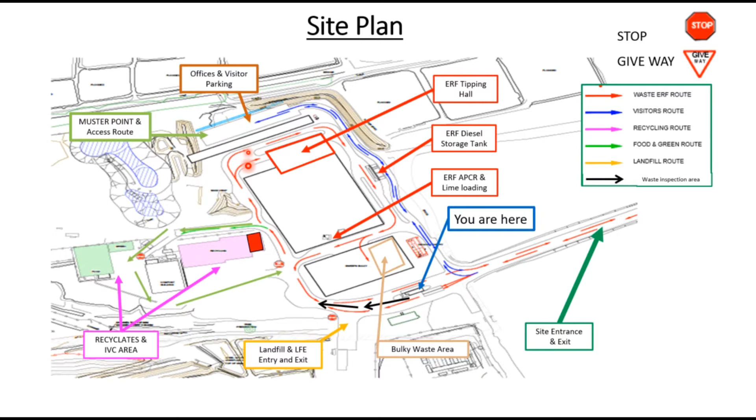There are different routes on site you need to follow depending on what you're delivering. To tip waste to the ERF bunker, you will arrive on site by the main haul road, where traffic lights will guide you to the correct weighbridge, normally to the left of the weighbridge building.

You will then drive over the weighbridge and up the road towards the tipping hall. After tipping, you will exit the tipping hall to the right, past the diesel storage tank, following the road round to the south side of the building before exiting via the weighbridge.

To tip food waste and green waste, once again drive over the weighbridge, heading north towards the tipping hall. You will see signposts for turning on your left. Turn left down this short road and into the food and green waste recycling area.

Take note of the stop line before entering. Once you have finished tipping, continue round towards the recycling building before exiting site via the weighbridge.

For visitors and those coming onto site for reception, at the end of the main haul road, turn right up towards the admin block, where you'll find the main reception. Drivers for landfill should turn left at the end of the haul road.

Take note of all give way and stop signs, especially on the tipping hall road. There are multiple pedestrian crossings on site not indicated by this diagram, including two on the way towards the tipping hall and more by the diesel tank and the APCR loading areas. There are also pedestrian crossings at the weighbridge.

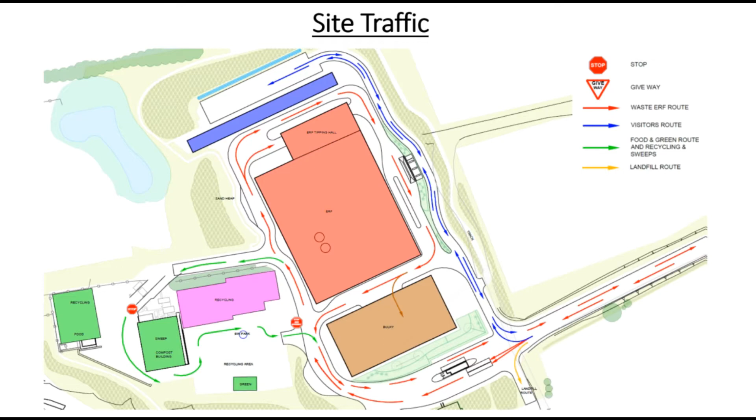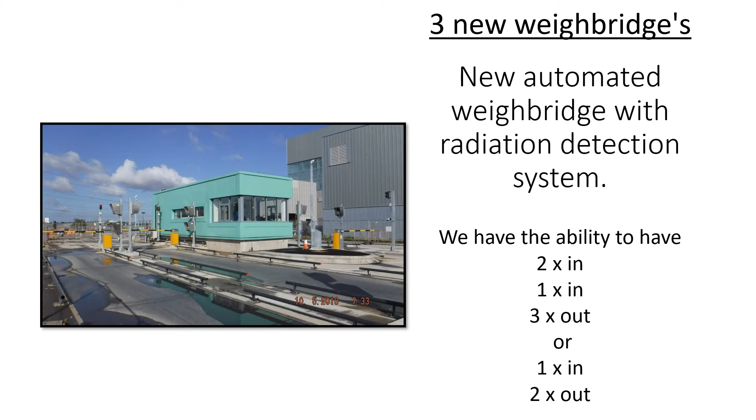There are three weighbridges operating on site. Be aware the flow of traffic over these bridges is subject to change, so pay attention to traffic lights before entering the weighbridge.

South London Waste Partnership, or SLWP, drivers will be given a 9-digit round code and a 4-digit PIN. When SLWP drivers arrive at the weighbridge, this PIN number must be entered in, following the instructions on the workstation screen.

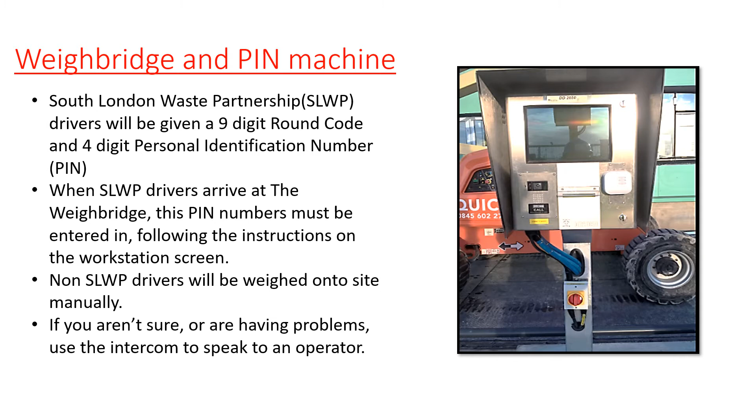Non-SLWP drivers will be weighed onto site manually. If you aren't sure or are having problems, use the intercom to speak to an operator.

If you require assistance whilst on site, stay in your cab, sound your horn three times with each blast lasting up to 1 second, and a member of staff will come to assist you. Vehicles are not allowed to park on site unless instructed by the shift team leader.

The site rules at Beddington ERF are as follows. The site speed limit is 10 miles per hour. The speed limit inside the tipping hall is 5 miles per hour.

Smoking or vaping is not permitted on site. Mobile phones are not to be used on site unless in an emergency. The recreational use of drugs and alcohol is prohibited on all Viridor premises.

CCTV and ANPR is in operation across the site. Please note there are driver welfare facilities on site, but they are only to be used in an emergency.

Only drivers wearing the approved PPE are permitted to exit the cab in order to operate their vehicle. Members of the cab crew are only allowed to exit the cab in an emergency. All Viridor staff, visitors and contractors are to be treated with respect, dignity and politeness.

The first failure to comply with Viridor site rules will result in the issue of a yellow card. A repeat offence will result in the issue of a red card. Drivers issued with a red card will be banned from site.

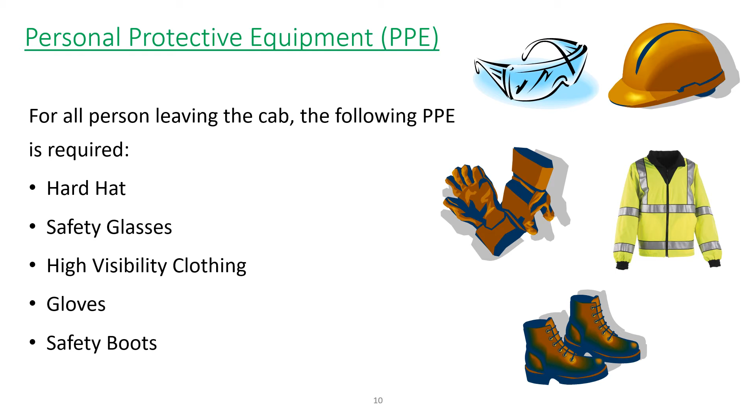For all persons leaving the cab, the following PPE is required: a hard hat, safety glasses, high visibility clothing, gloves and safety boots.